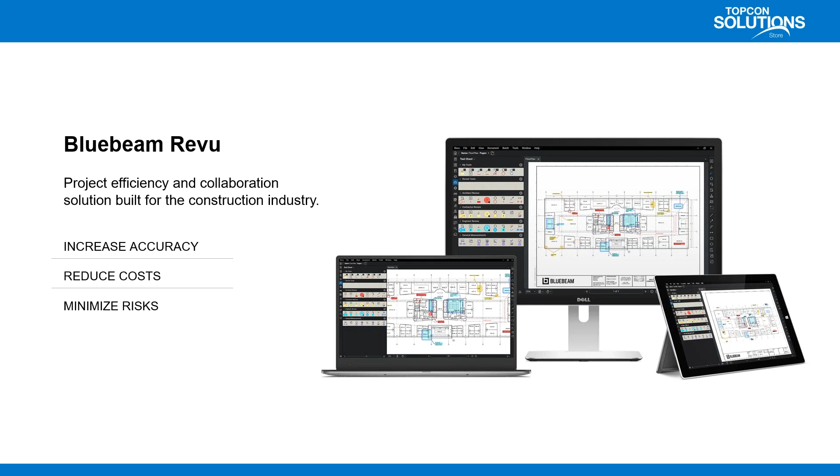With Revu, we know it helps AEC professionals increase accuracy, reduce costs, and minimize risks with features that enable a variety of processes during design and construction. With Revu 20, they've really focused on improving the collaboration, communication, and task efficiency for this release.

One of the first things we've seen is that we can get more done together with Studio and Revu. So they have done some Studio improvements. They have improved the user and content management capabilities for greater flexibility and control. We're going to see that here in a second when I demo this for you guys.

Next, they've actually improved the markups. You're going to see new and improved markup and measurement tools to help you effectively communicate. You're going to see improved markup list filters to better manage your project data. And I've got a few other little things I want to show you guys, so let's go ahead and check it out.

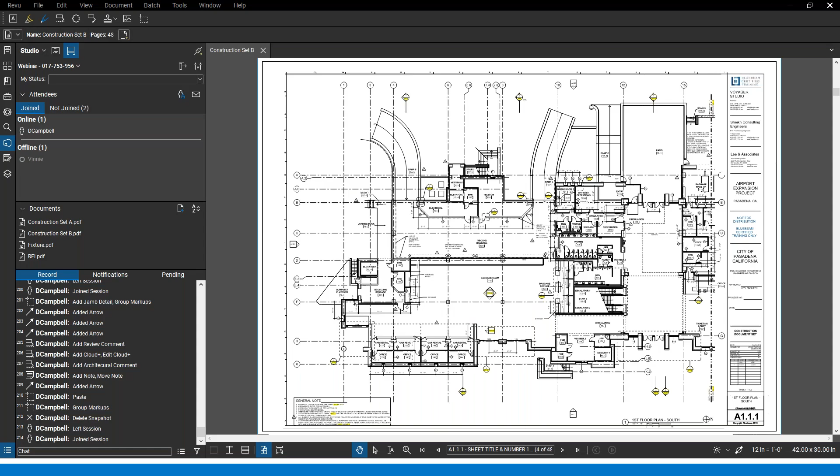Revu 20 itself, you're not going to notice a huge change in terms of the interface, thank goodness. So we're sticking with the same interface. We're still going to have our same drop downs, everything like that. You have access to your toolbars, tools, and all of your tabs.

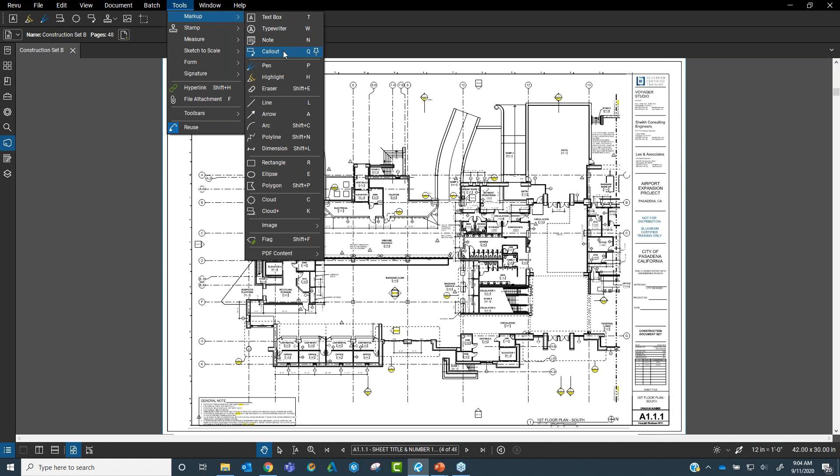One of the things I wanted to start with was some of the markup improvements. Let's start with something like our callout or a text box. One big thing we're going to see, I'm going to go ahead and just put this one up here: any markup, text box, callout, anything like that can now accept the add leader. So you can add a leader to any markup now, and what's really cool about this is as you move around, notice my leader is repositioning.

It's resnapping, so that's a great feature. Before we used to just be able to do that with the callouts, where we could add more leaders and keep going that way. But now they've pretty much applied it to all the markups. Now, another big thing that we've been waiting for is actually in the measurement tools, and that's our poly length tool.

Now, I don't know how many of you have played with the polyline tool or the line tool, and the poly length tool itself. Normally with the polyline and line tool, we could grab a custom line style and place that within those tools. With the poly length tool, not so much. We'd go into properties, into line styles, and be restricted to the standard types. Well, for this year's release, you'll see we have access to the advanced types, but we can also create our own line style.

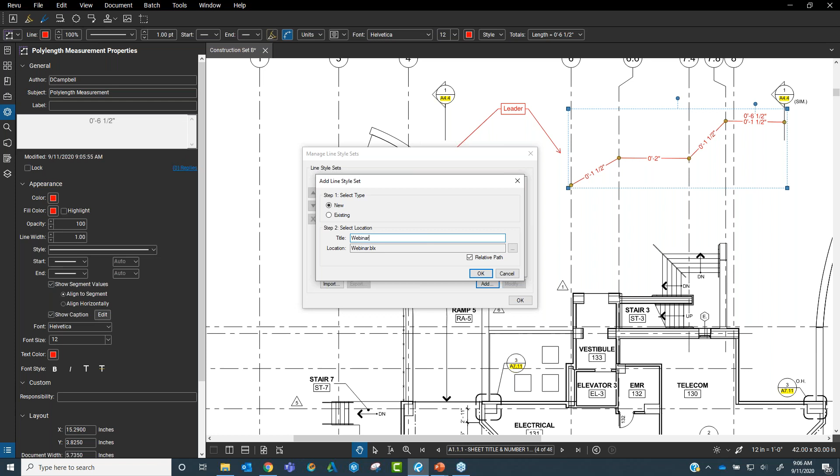So I could go ahead and say this is going to be webinar example, and here's where we add our first style. Essentially from there we can choose our dashes, our spaces, text, vector, dots, anything like that, to really build out and customize our lines. I think that's a great feature, especially in these poly length tools, for identifying and separating our different tools. If you're building tool chests with smart information built into those markups, having a line style to help identify or break it apart from others is a great feature.

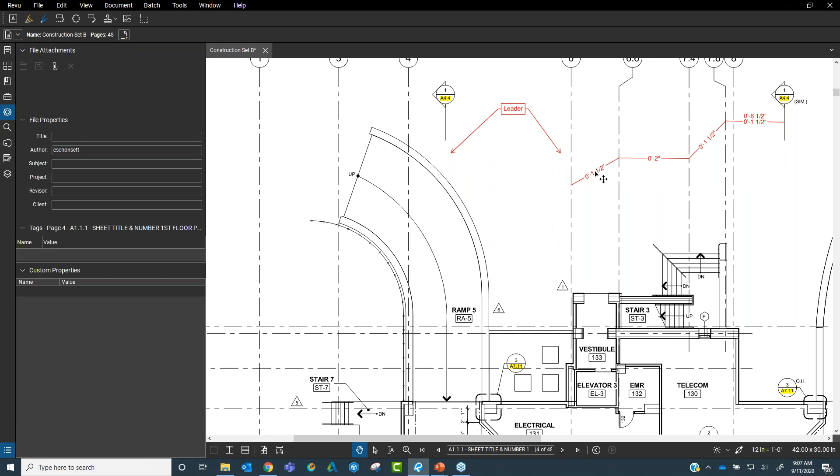Now, another thing you're going to see, also having to do with markups, is in your markups list. Notice we have the same kind of filter icon, but now it says filter list. Notice also when I activate it, we used to have the little filter icon populate next to all of your columns. This time they pretty much just light up, and then you'll see those little sliders, and we can click in those sliders and find any saved filters.

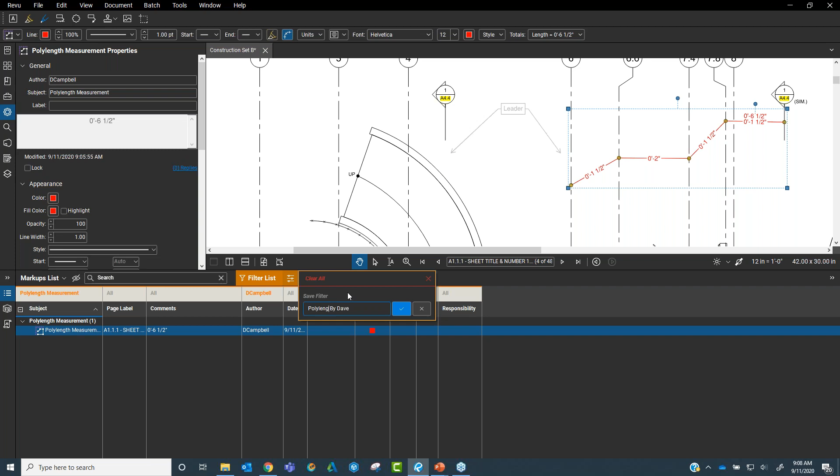So right now I don't have any saved filters, but let's say I want to use that poly length measurement and find who it was by. So we're going to say by me, and there we go. If I want to save this filter, all I have to do is, let's call this poly length by Dave — I'll take down that Y there, poly length by Dave, oh I misspelled something this morning too — but here's essentially how I can go ahead and save that filter.

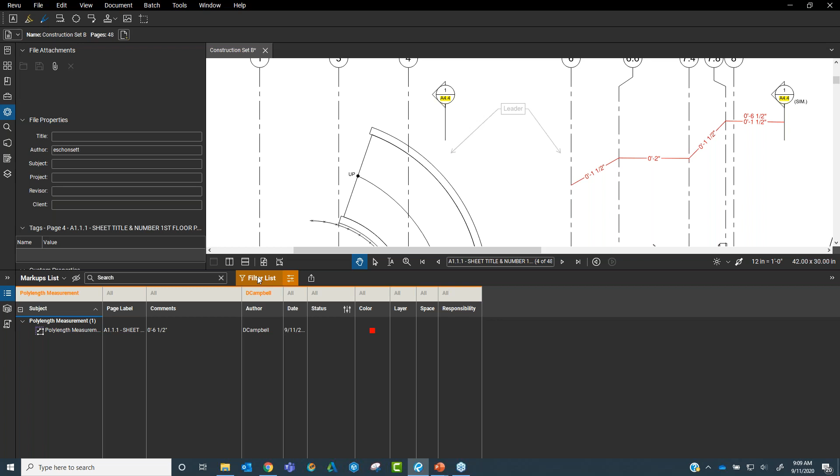Now, another thing I wanted to talk about — let me close this markups list and my other panel. They've actually put in a new feature under Help, where you'll find Tools and Commands. Let's say I want to find studio — as soon as I type in studio, it brings up my new studio project, open studio project tab, and the studio panel here. This is a great way to find any information inside of Revu in terms of features or tools. Very helpful if you're new to Bluebeam Revu.

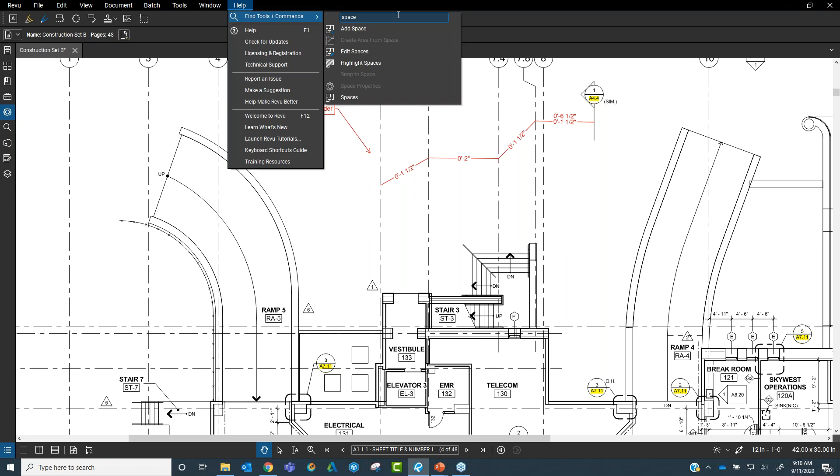I know that finding things, especially when hidden at first, when you get into these profiles, can be a little difficult to know how to click or what to click to get those items up. Now we can just click in here — I notice I don't have my spaces, so let's do that. If I go with a space, I have my spaces tab here: highlight, edit, add space, all of those tools are right there. Very easy to find, and you'll notice it also brings it to the front for me.

Okay, so that's also pretty important. Now, last couple of things I want to say for this.

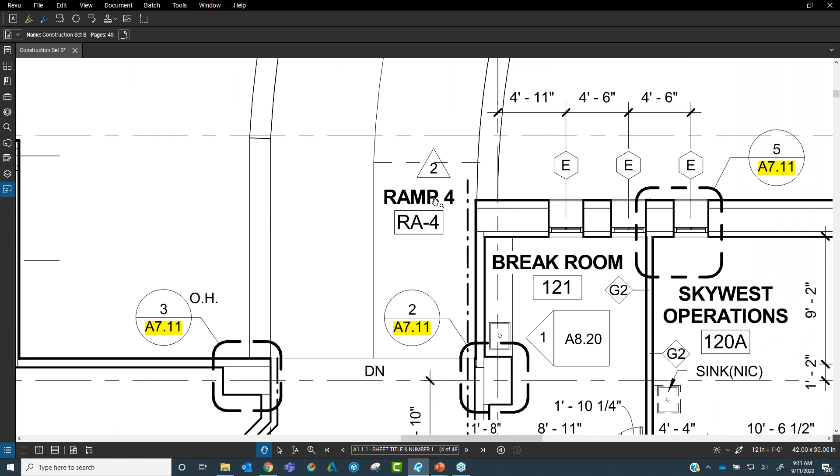You're also going to notice that they've improved the rendering engine for Revu 20. Every year we try to get better with rendering, not just when you zoom in and out, but when you have a big document set with a lot of markups. These markup heavy documents can really be hard on the rendering engine inside Bluebeam Revu. For Revu 20, they've upgraded that to keep up with those markup heavy documents, and you're going to see an improvement there.

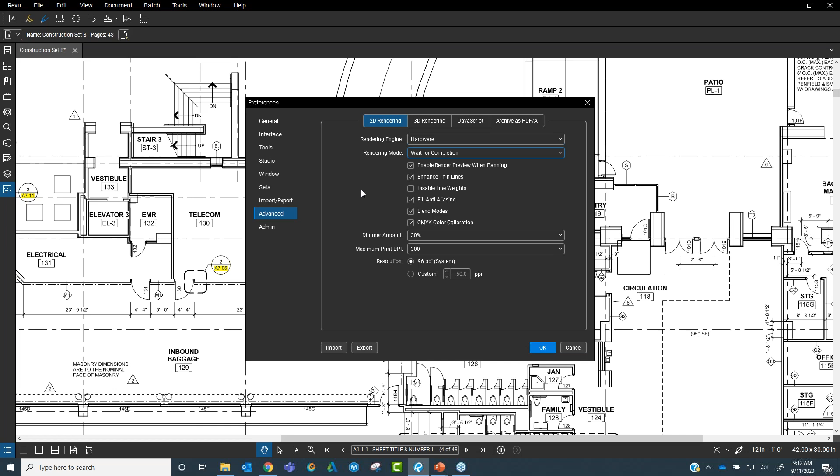Another thing I'd recommend when you see that kind of struggle is to get into your preferences and check the advanced tab for rendering. What rendering engine are you using - hardware, software, or legacy? What rendering mode are you using? Play with your settings a little to find the optimal area for rendering speed and how often it renders. So we're going to see some more improvements there.

Also, we're going to see improvements with Studio. They are constantly improving Studio as well. One big thing for our friends overseas in Australia - we now have an Australian hosted Studio server. That was an improvement brought to Studio this year.

Along with that, there have been improvements with managing Studio projects and Studio sessions. There's a couple different things you'll notice. As soon as you get into your session, you're going to see joined and not joined. If you're the administrator who started it, this just lets you know who has not yet joined your session. So you know, hey, let's go ahead and send a reminder out to join my session.

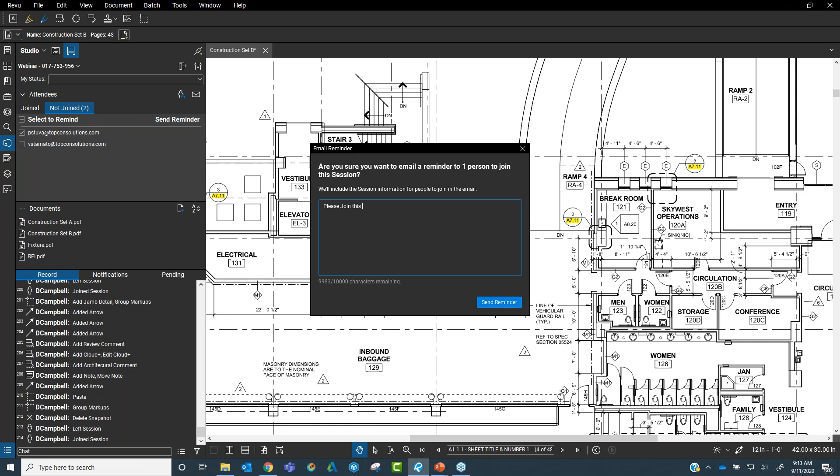Please join this session - go ahead and send a reminder. That's going to send an email out to the person, who's going to look at it and it's going to remind him, hey, you have this session going on, it'd be good of you to jump into it and join all of us. So it sends a nice gentle reminder there.

You're also going to notice that if I leave that session, it's going to tell you what sessions you have joined and not joined. So if you have an invitation sitting there, you can jump in right here and find any of those sessions or projects - it works both ways, sessions or projects - giving you the opportunity to jump into those.

Another improvement I've seen is that when you're inviting members, you can actually invite members that don't currently have a Studio account. Before, when you tried to send out those invitations, it wouldn't really let you. Now we can type or paste the email, add emails from groups which is awesome, and use your address book.

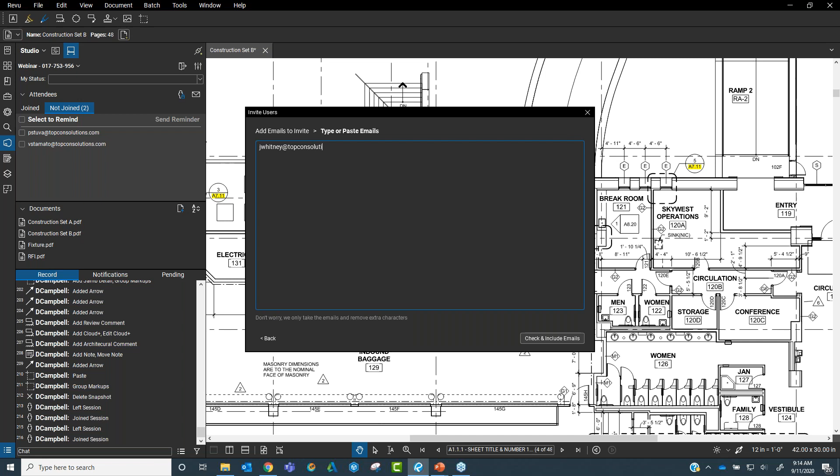So if I wanted to type this out, let's say j@topconsolutions.com, and we say check and include emails, and then invite participants. Now this person does not have a Studio account, but I've been able to send that email out, and when he gets that invitation, he can jump into Studio, create a username and password or register his email address, and then join right into the session I've invited him to. That's also another awesome improvement.

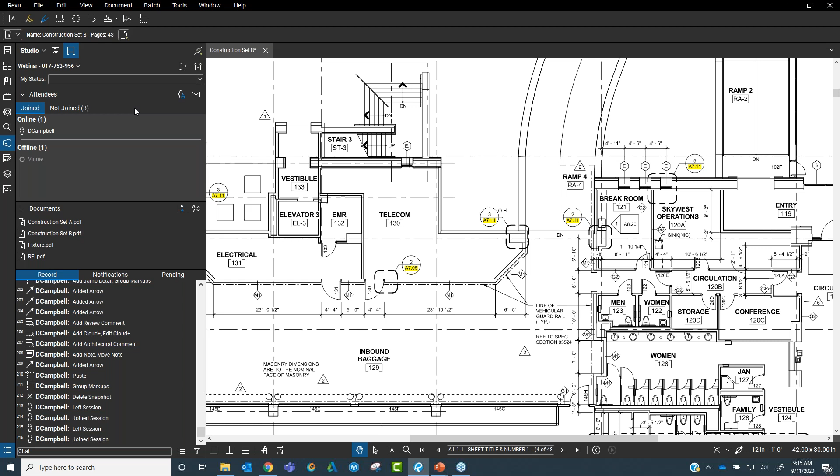That way we can send it out if somebody needs to download the free trial and get access to the Studio session from that. They would still be able to get the invitation, create that Studio account, log in, and cooperate with everyone else.

The next thing we've got is the find tool. It's extremely easy to use, and it's far less clunky—I'd agree with this—far less clunky than the old method of searching and trying to find these tools manually.

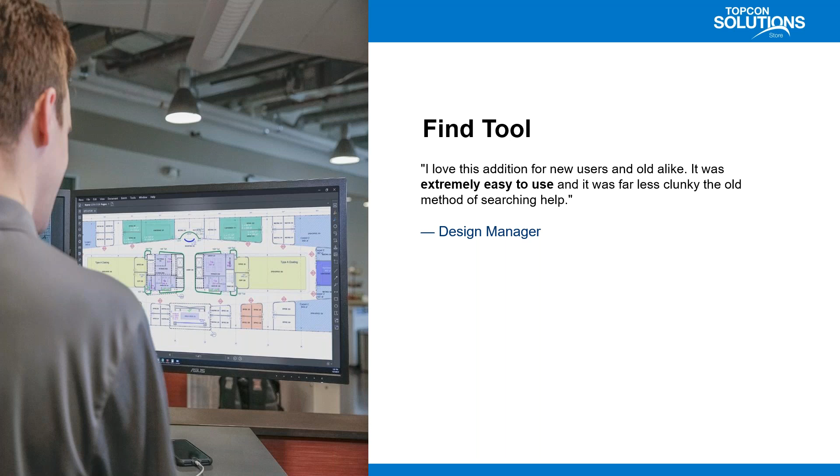As far as support and training for Bluebeam Revu, if you guys are looking for any tech support, implementation support, deployment, or training, we are here to help you. Topcon Solutions has a professional services team that specializes in full technical support, implementations, and training assistance. We support businesses in establishing best practice processes for plan review, helping to navigate the challenges of technology adoption across multiple departments, and shorten permit review timelines, and save money on paper and its associated costs. Whether you're new to Bluebeam Revu or you've been using it for years, we have the right offering to help you deliver a best-in-class service for your clients.